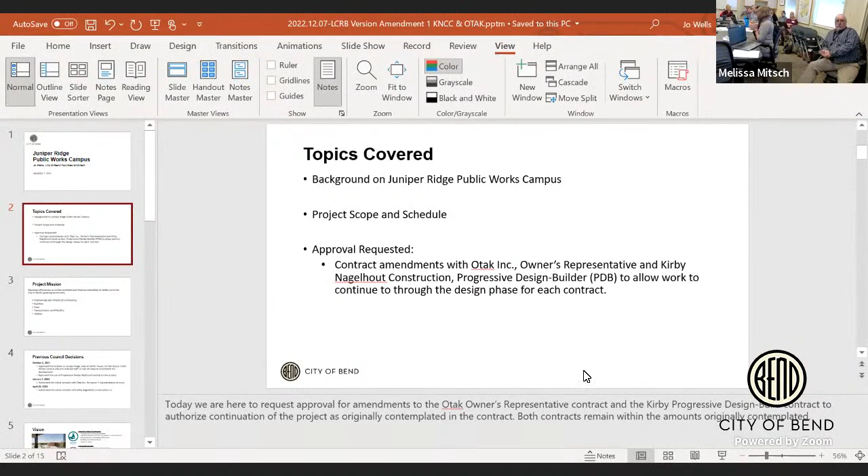Both amendments are within the amounts that were originally contemplated within the contract already, but this is to authorize the next phase to move forward.

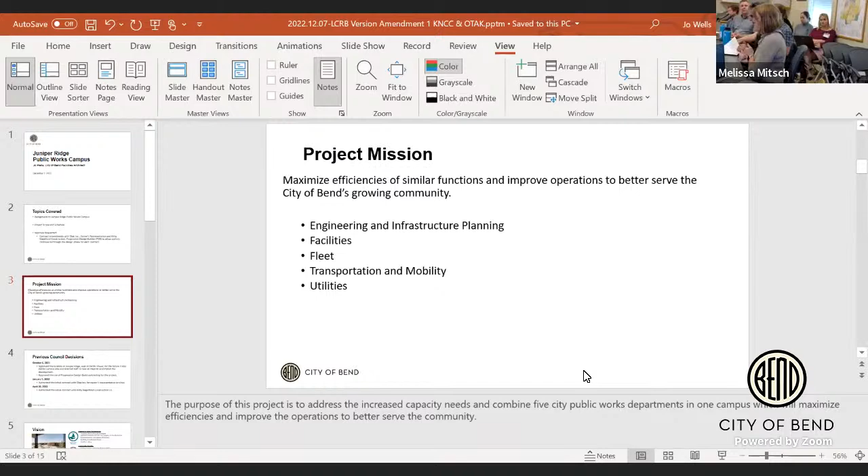The project mission, the purpose of the project, is to address our increasing capacity needs and combine the 5 city public works departments into one campus, maximizing efficiencies and improving operations to better serve our community.

There have been 3 council decisions on this project to date. The first was back in October of last year, when council authorized us to move forward with the alternative contracting method, as well as authorize the site within the Juniper Ridge location, just to the east of the Pacific Power site, between Cooley and Talus.

Just putting in the presentation there. Yeah, it's just, sorry.

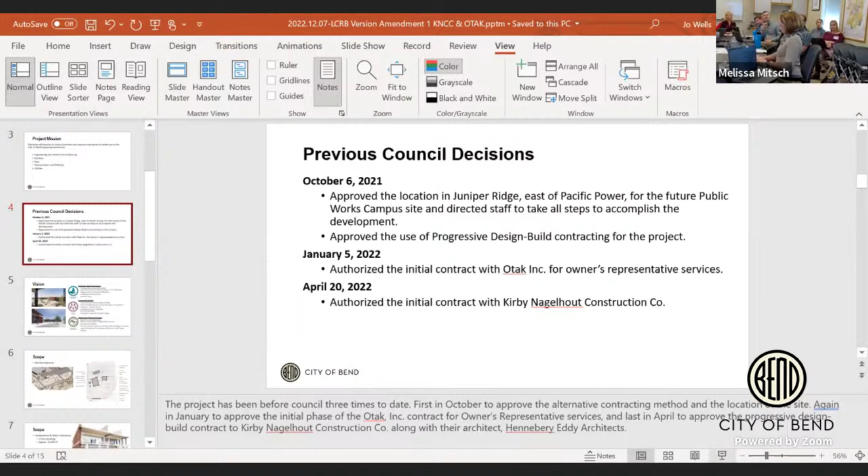What we've done to date, we've done a number of meetings, workshops and such with stakeholders and city leadership. In doing that, we consolidated a common vision for the project.

There are 3 primary categories incorporated into the vision: supporting a supportive work environment for our employees, providing community benefits to the community we serve, and also supporting council goals around sustainability by creating a regenerative campus.

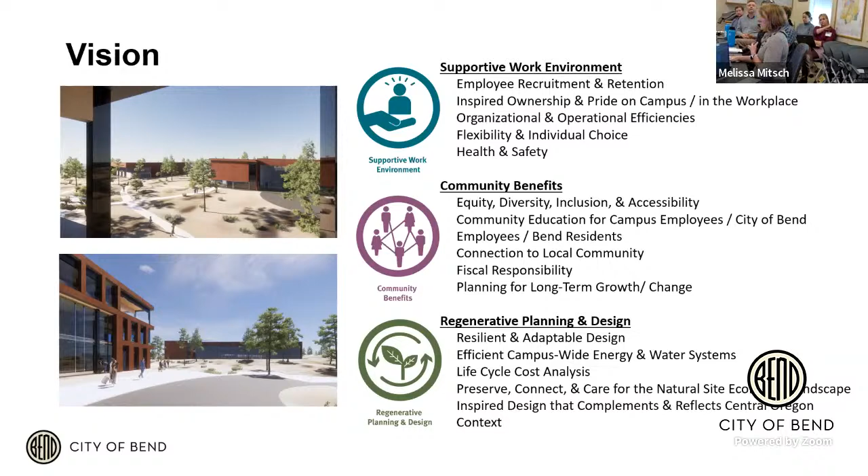The scope of the project includes approximately 30 acres. There are a number of activities that occur on the site to support the work that the departments do. There's a large yard that provides parking, both covered and uncovered, for the fleet vehicles. We have a decant facility, storage for outdoor materials including all of our sanding and rock piles that serve the city, and then a decant facility for taking care of waste from our vehicles.

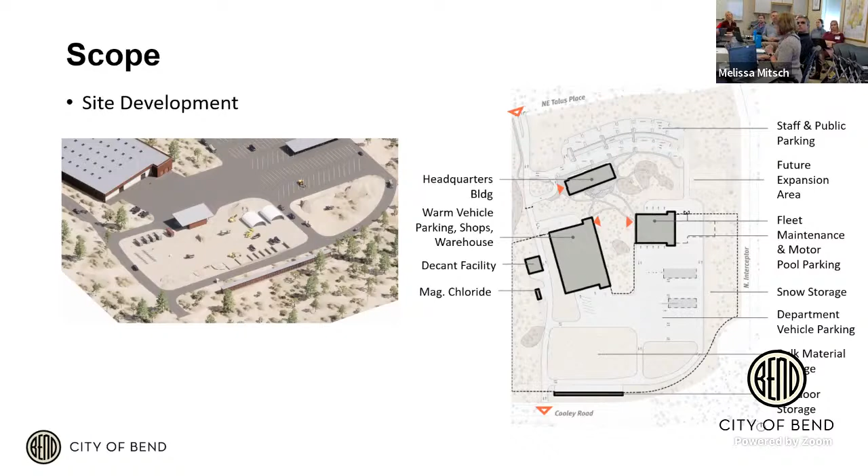There are also 3 buildings on site. You enter the site from the north and will head to the headquarters building first. That's the public access. Our headquarters building is a 3-story facility. It includes our administration facilities, meeting spaces, both for the department as well as for public meetings. We have the utilities water lab within that facility.

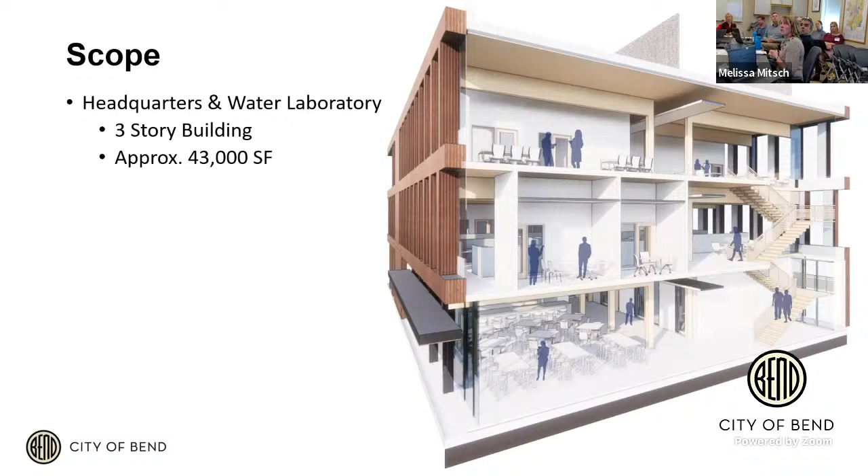And then we have space for our crew workers to consolidate into one location, with crew meeting rooms and support spaces for all the crews and employees that work on the campus as a whole. So a lot of the efficiency is through consolidating functions and creating a more active, engaged workplace. The second building on site is our warm vehicle storage building, shops and warehouse.

There are a number of fleet vehicles within our fleet that require a temperate environment to prevent freezing, so this is a large facility to house those vehicles and keep them from freezing, to be able to service the community. We are also consolidating shops that we currently have at our different facilities into shared shops for all of our crew workers, and we have a warehouse facility that will more efficiently store all of our goods that we utilize throughout the city.

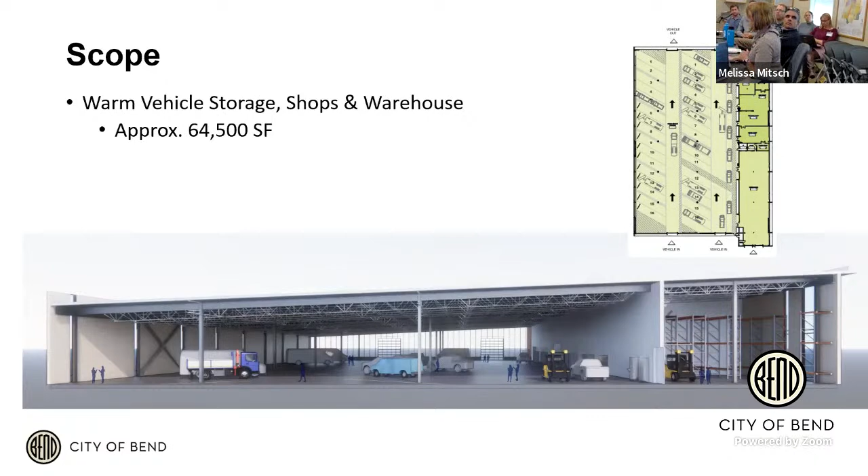And then the last building is our fleet maintenance facility. This will be relocated to the site, servicing all of the vehicles that will be on the site, as well as all of our other vehicles that the city has, including police and fire vehicles.

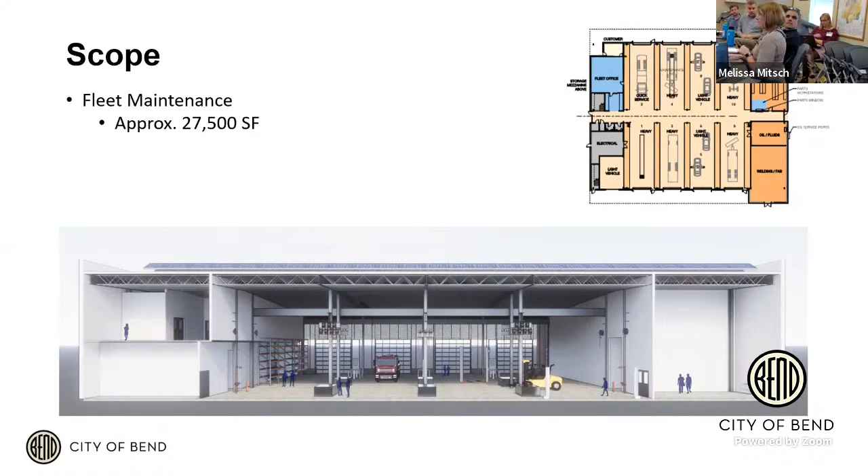As part of our goals for the campus, we have a pretty strong focus in diversity, equity, and inclusion. From the start, we selected partners to join us on this project who were also committed to community benefits and diversity, equity, inclusion. To date, our sub-consultants make up 4% Oregon certified firms, and another 5% are firms that otherwise would qualify, but are either certified elsewhere or haven't gone through the certification process.

As we move forward during the next phase, we will be finalizing a diversity, equity, inclusion procurement plan, working closely with procurement and legal to further our ability to bring on subcontractors that are certified subcontractors in the area, and encouraging more Central Oregon certified contractors to become certified.

In addition, from a sustainability lens, the project is pursuing LEED certification, and we have also enrolled the project in the Energy Trust of Oregon's Path to Net Zero program. We will be using the 1.5% for green technology that is required by the state for all capital work to go towards photovoltaics, which will help energize and provide the energy consumption for the site.

And we're also planning not only for today's electric vehicles that we have today, but also planning for the future as our fleet converts to electric vehicles over time.

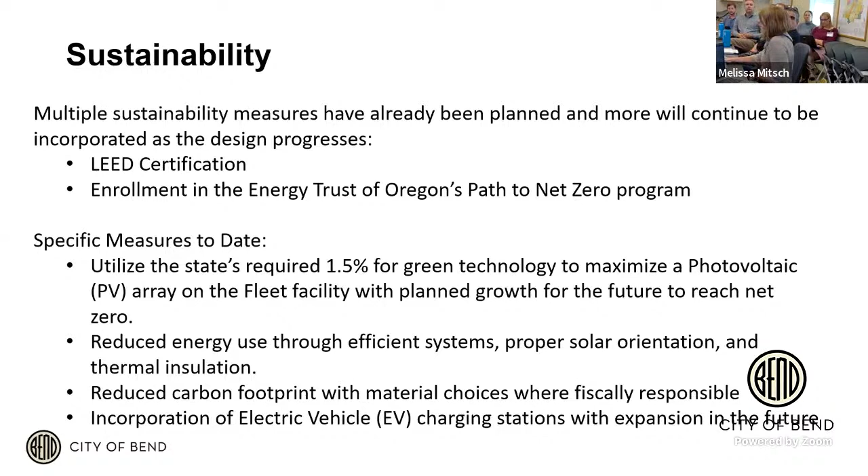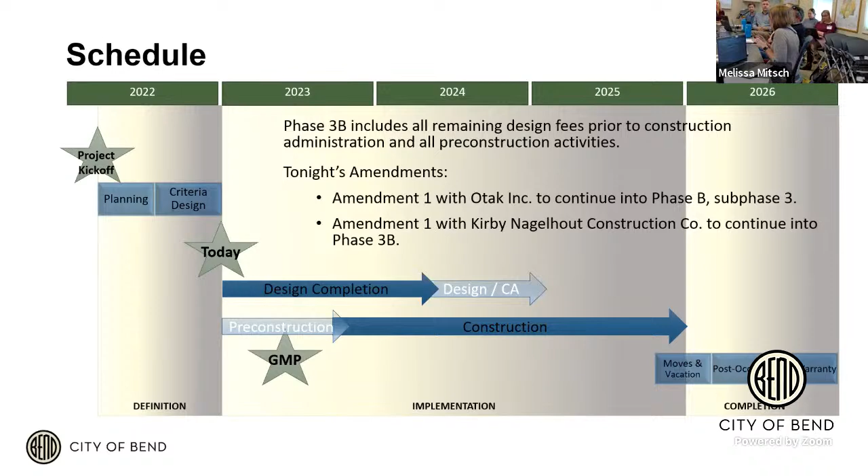From a schedule standpoint, what we have done to date, we've gotten through these first two phases, which we call criteria design and target budget. We've landed at, and today we're here to get authorization to continue and complete the design work required to do this project. We'll then be coming back to council, planning to come back in the springtime to get authorization for our guaranteed maximum price, which will complete the rest of the project. So right now we're only authorizing the design portion.

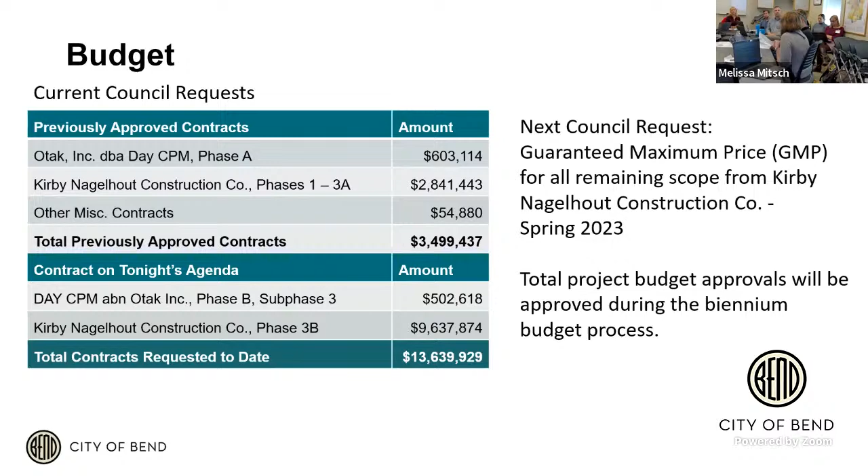And with the design portion, also the pre-construction services, as well as our owner's rep contract to continue. To date, we've authorized approximately $3.5 million of work to be completed, which will be completed at the end of the calendar year. And what we're requesting is approximately $10.1 million additional to complete the work as outlined in the issue summary. And wrap it up with questions.

Okay. Just if there's any feedback on if you want to go on the presentation, this is for the full council Wednesday.

I think probably the whole council is going to want to know the history of why this is needed, because we've gone through it a couple times, but it's good to get a little bit of the history and also what's happening at the place we're making. There's just pictures of our existing facilities and all.

And Russ, maybe you could tag team with Joe, and we typically look at the why from an operational perspective. So maybe have like an intro to Joe. That's great.

And just to commend Joe, there's been a lot of staff involvement in this too. We have a very aggressive approach where we've had multiple open houses and field trips, and it's significantly changing going from our existing setup.

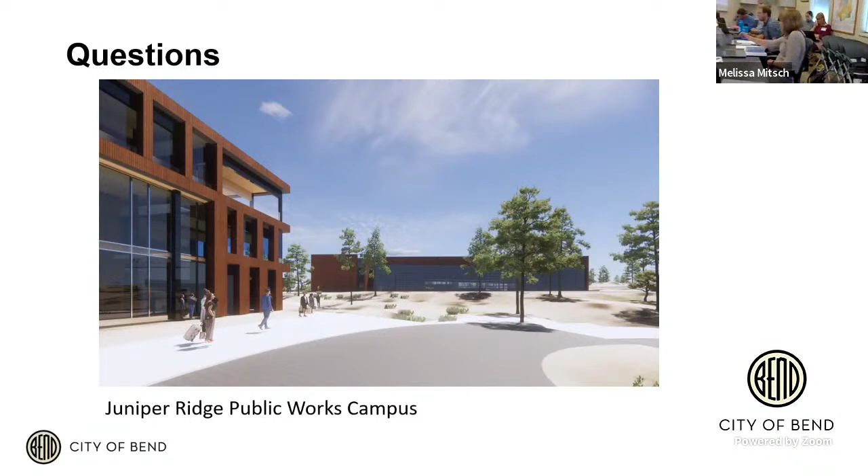So the next item is the Purcell Boulevard Extension, proposed contract with Taylor Northwest, and then also an overview of the entire Neff and Purcell project. We'll share it.

I'm Drew Wells. Okay, didn't mean to slow my time down. Yeah.

I'll just say while you're bringing that up, just to frame it up: you're gonna hear from Drew on December 7th and again on December 21st. That's intentional, because one of the projects is SRF funded, and we had to separate that to make it obvious which one was and which one wasn't.

It's the clean water state revolving fund, a fund that we use to help fund, so. What he's gonna talk about tonight is not DEQ funded, and for today you're gonna cover the whole thing, but on the 7th it's not DEQ funded, and on the 21st it's what is. We're split, yes, not for the purposes of this, but the two council meetings, 7th and 21st. Don't tell me in a few years these acronyms will be known. Yeah.

The reason CWSRF, Clean Water State Revolving Fund, is on the intersections is because there's sewer and stormwater improvements, which is what's eligible. The extension only has water, which is not eligible. So that's the reason why some have the funds and some don't.

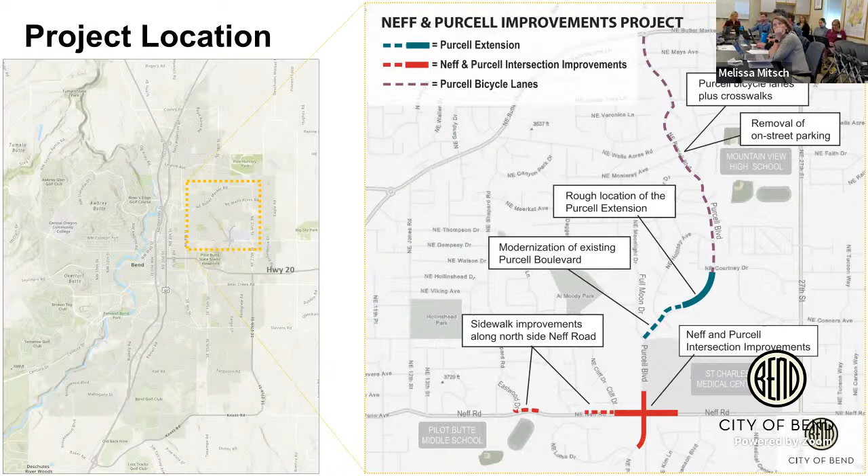There's a little more detail on those different sections. You can see some more detail on the intersection there with the different sections.

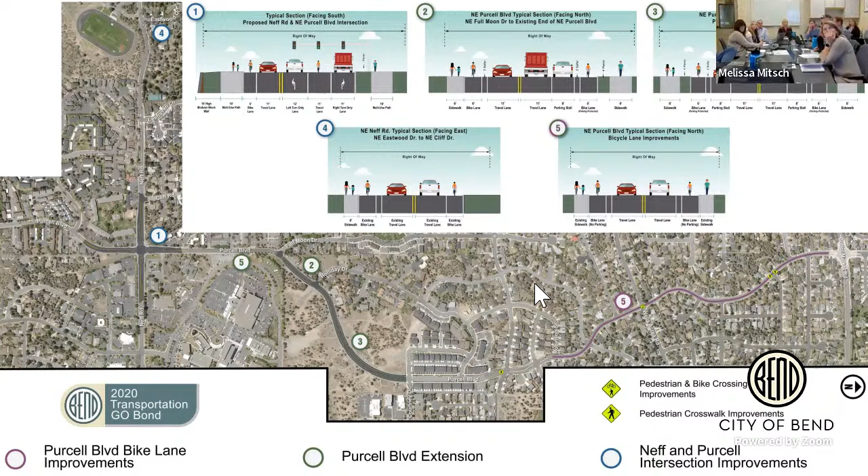I'll just highlight some of the things here, like in the extension area that we're building - the bike lanes, and the cars are the barrier and buffer between the bike lanes and the travel lanes. So where there's on-street parking, you'll see some cross sections that really highlight that separation. Yeah, I might drop that slide altogether.

So the first, biggest component of this project is the intersection project, which is reconstructing the Neff and Purcell intersection. There are a lot of issues at that intersection - it's an outdated temporary signal, never meant to be permanent. Now we're finally replacing it. There are ongoing safety concerns due to capacity issues, with long queues and congestion down there. The proposed improvement is to totally reconstruct the intersection and replace it with a traffic signal, which was the selected alternative from the alternatives analysis in 2019, compared against a roundabout.

In addition to reconstruction of the intersection itself, there's some sidewalk infill west of Purcell, so there will be continuous sidewalks from Purcell to 8th Street on completion of the project. There are also significant utility improvements within the intersection for sewer and storm - the slopes were too great, just some topography issues there, and it was not functioning.

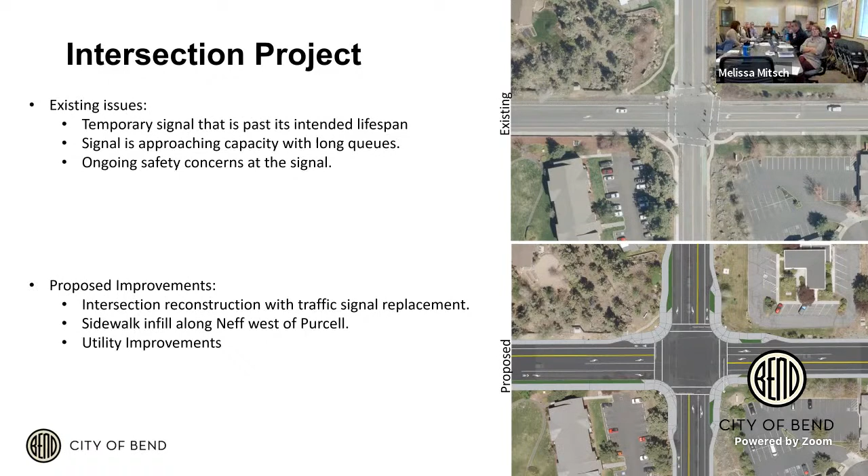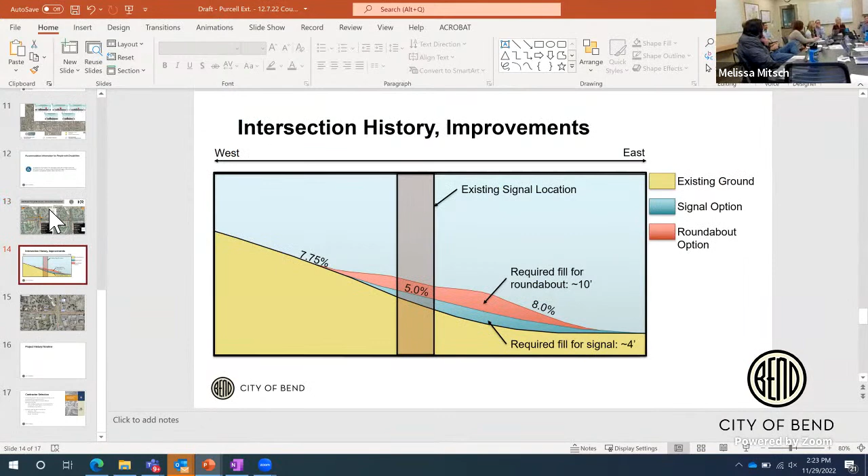Maybe that's a question for council - we previously presented the comparison of a roundabout versus a signal. Do you want that revisited, or was that decision made years ago? Do you want the highlights of why the roundabout was not chosen? It'd be nice to know the history.

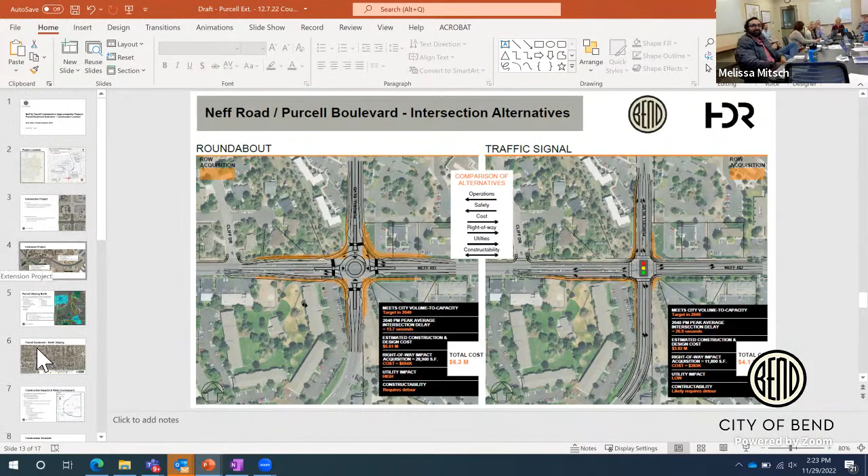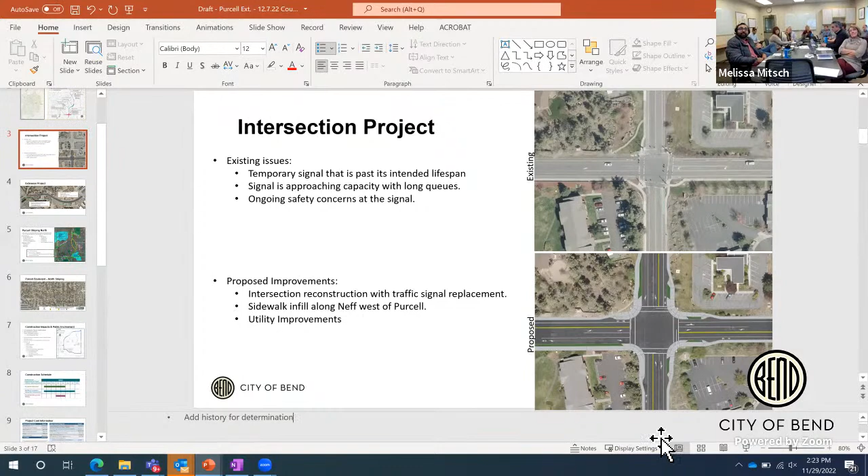On top of that, there's the modernization section, which there's existing road there, however widening to add sidewalks, some parking on the east side of Purcell and the bike lanes. Those will also be parking protected where there is on-street parking. And then there's also marked pedestrian crossings that'll be lighted as well at Full Moon, which two there, as you can see. And we will be striping for bike lanes from Full Moon south of the intersection with the continuous bike lanes from Highway 22, buffer bike lanes.

So in this section, there's the whole, they're all buffered. Excuse me, yes, they're not park protected though. But yes, they are all buffered.

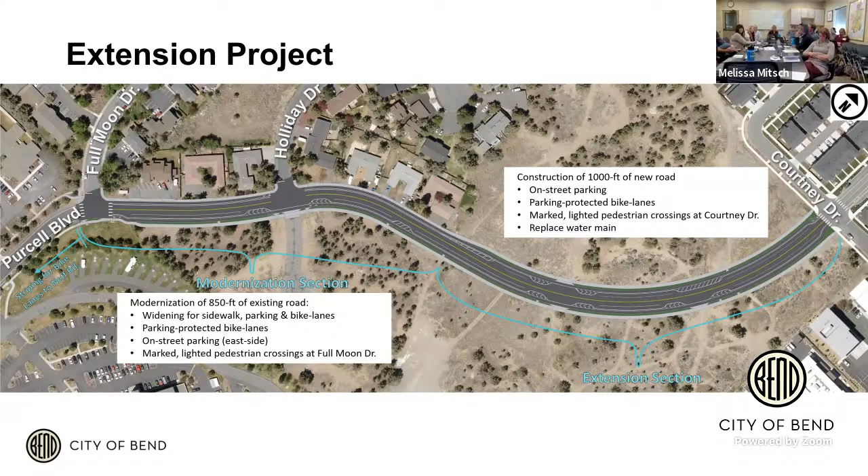So that's the extension portion of the project. Sorry to interject here, as Russ mentioned, we've worked extensively with St. Charles to acquire this land with dedication. So there was a lot of partnership between the city and St. Charles to get that land for us to even do this project. Otherwise, they would have done it when they did their master plan development, of which they have no plans at all, no timeline. So this really helps the city complete that roadway corridor.

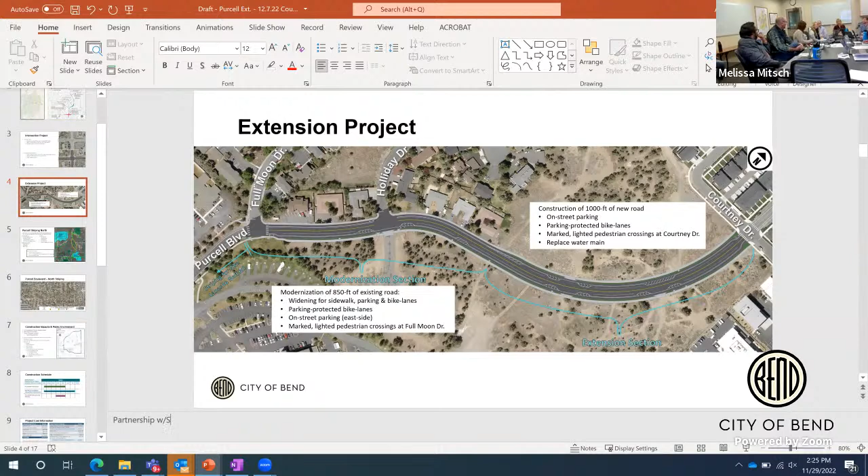Did I discuss that? Just say it was a partnership. I'd say we basically said, well, you guys can build it on your dime, and we can build it if you give us the right-of-way. We'd rather build it - they were really nice.

Okay, it's the extension portion of the project.

The third project in this area, which won't be completed by our construction contractor for the Neff/Purcell Intersection Improvements Project but completed by city staff, is striping bike lanes between Butler Market and where they currently end near Jackson or Indigo Street. You can see in that dashed line area. And so this provides a lot of connectivity between all these services, the schools and community parks.

Definitely an important gap to connect, provides a little connectivity. You can see the light green is what's been funded or planned to date, and dark green is planned, not yet funded, and there's the existing trails you can see on there.

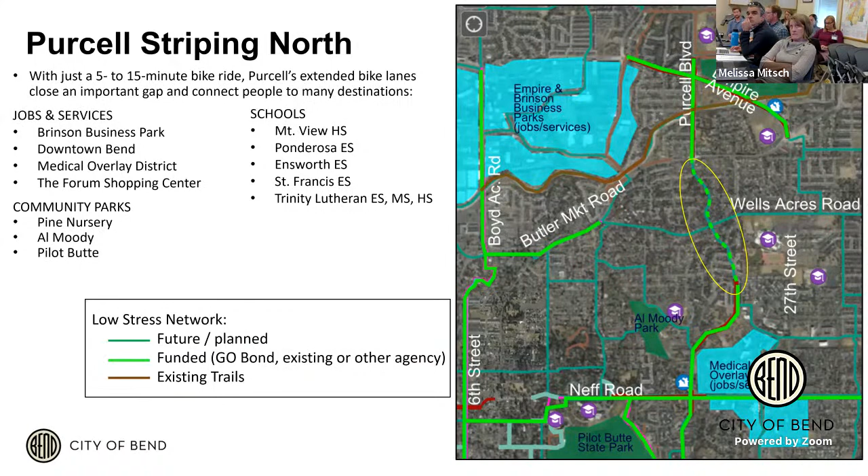So it provides a good connection between there. And the hospital mentioned that it provides another way to get emergency vehicles to the hospital. Yeah, definitely, and it pulls a little bit of traffic off 20. And it's paint, right? It's just paint. Yeah, that's all there's room for, paint.

As far as the feedback, I'm not sure how much to discuss from the open house. There were concerns from a number of people about safety, how this will impact the safety of the corridor, traffic use, and also the loss of on-street parking.

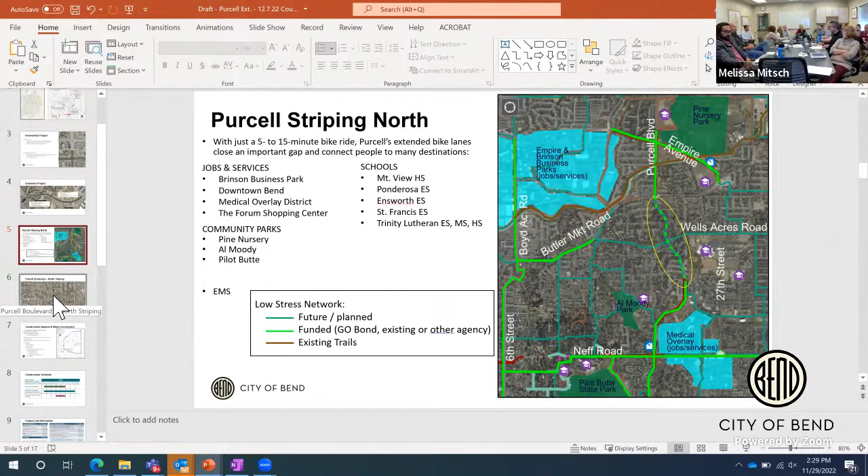Crossings were a big one. Some of the city crossings—are they just painted? They're looking at a raised median in the middle at some of these locations as well, so it might be more than striping. But I think the important thing is that it's been a collector on the TSP for a very long time, so we're just now implementing it.

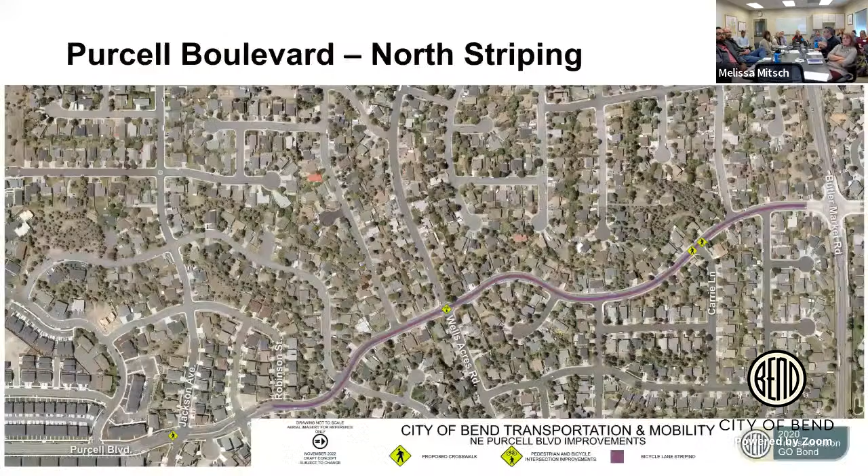With this project, particularly the intersection, because of the grades we're required to fully close the intersection so we can construct it—that's the constructability challenge. With that comes significant impacts to the public. Because of the need to close this intersection, we utilized the best value procurement method for selecting a contractor, which balances a blend of qualitative selection based on proposals and price.

Taylor Northwest was selected as the highest scorer, and they proposed what they call a siren response plan as an alternative approach to helping get EMS through this intersection. Simply put, they'll have somebody on standby to throw a trench plate over their work and let EMS through as soon as they get a call. We'll be coordinating with EMS and Taylor Northwest to ensure that's successful.

Because of this significant impact, we have a pretty robust public outreach effort. We've presented at 2 open houses and 2 Mountain View Neighborhood Association meetings to date. We have another construction open house planned for late January 2023, and we'll continue outreach through multiple methods, coordinating with all the major stakeholders in the area—hospitals, schools, EMS, and the heavily impacted nearby residents and businesses.

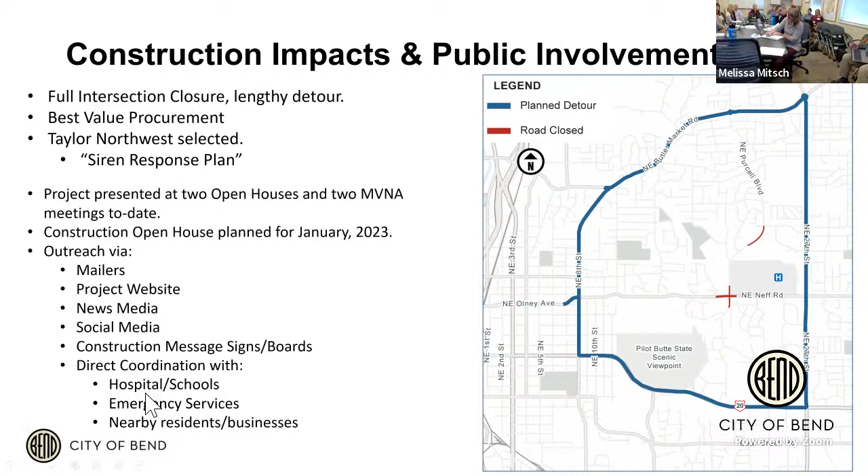You can see the map on the right. It's a fairly simple construction schedule—we're going to have the extension and the intersection constructed concurrently, with the extension being completed near the end of May. The city would be striping the bicycle lanes on that north section so that's complete before the extension opens. Finally, the whole intersection is expected to be open at the end of July.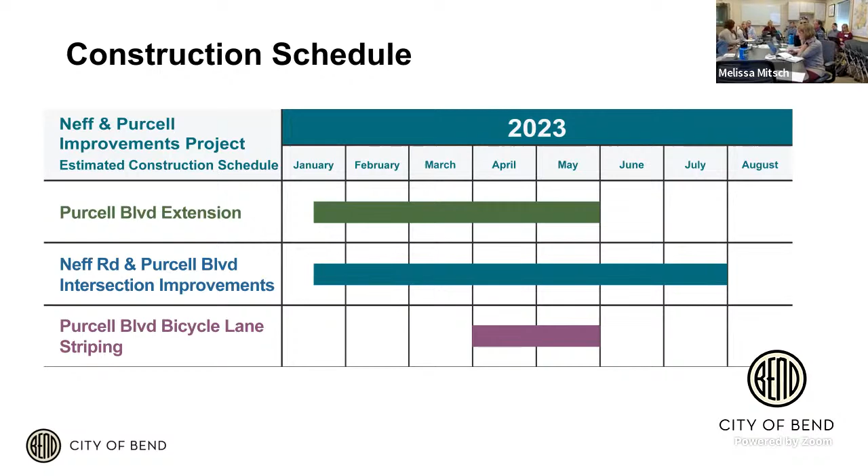The current project budget has multiple funding sources, split over the 2 parts of the project constructed by our selected contractor.

The council presentation will change a bit, but those would be the amounts. You'll see the same slide twice—on the top right-hand column it says on tonight's agenda, which is December 7th, that's the extension contract for 2.296 million. Then on the 21st, we'll bring the same information and it will apply to the intersection construction future contract amount, which is 4.8 million. So it's the same information regardless of the date.

It isn't one contract—we're asking for one contract on the 7th for the extension, and another one on the 21st for the intersection.

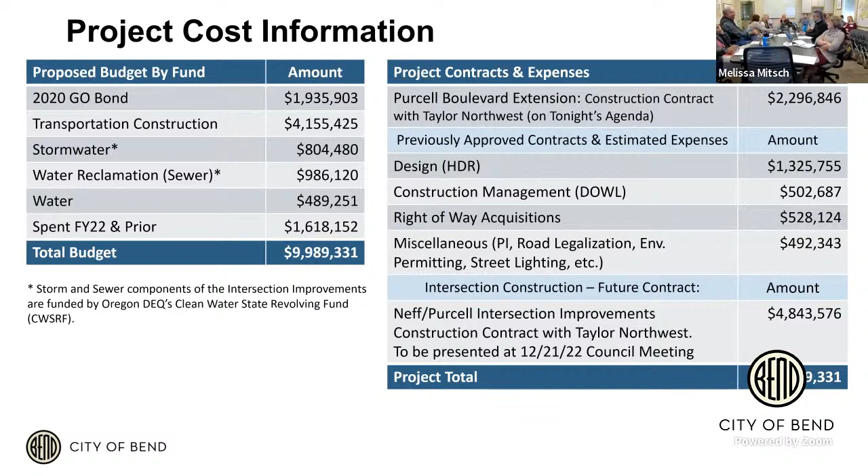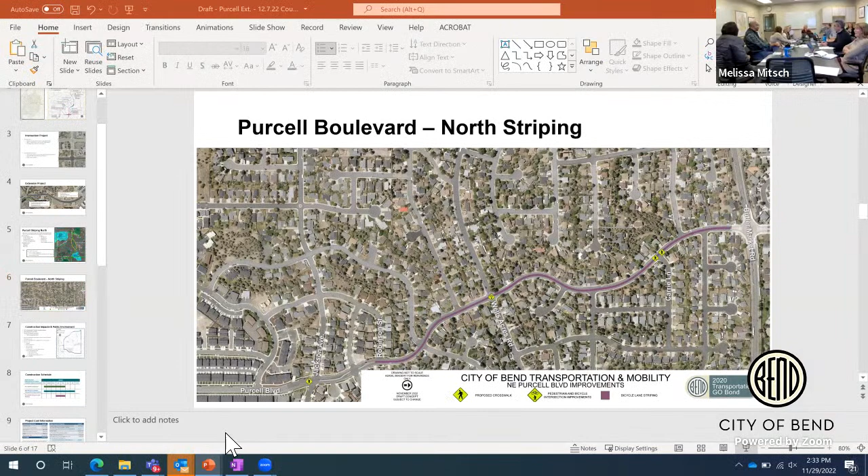DEQ has to review it for concurrence, so while they're going through their review period, we're going to do one contract so we can get going on the extension. Once we get approval, we'll bring the other contract on the 21st. It's a bit of a piecemeal approach, but that's the best way we can execute this to get the contract moving. We wanted to preview this for people, just so you know it's coming back at the next meeting.

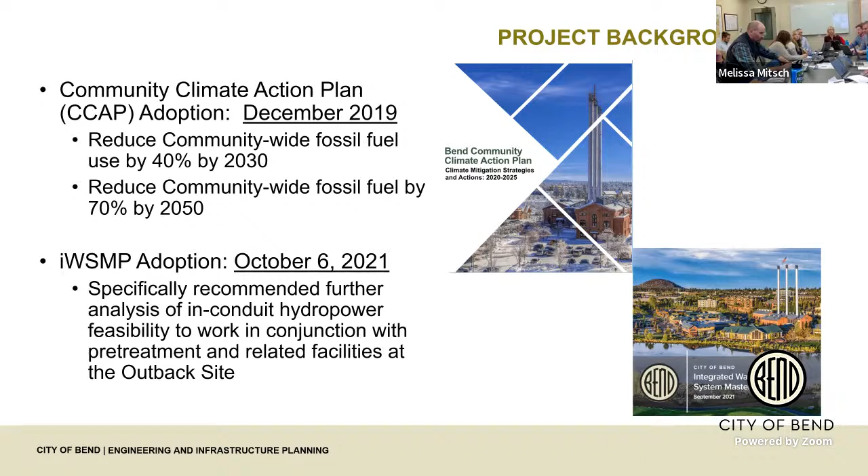So with that, I want to show a quick overview schematic of our water system. We have our intake facility up at Bridge Creek near Tumalo Falls. As you can see, that water experiences a pretty significant drop in elevation. We have a really unique water system here in the city of Bend. This shows a nice visual of the large elevation change we get, not only from the intake facility to the water filtration facility, but also to other lower points of our distribution system—that's water pressure, that's potential energy, and that's what we're interested in considering.

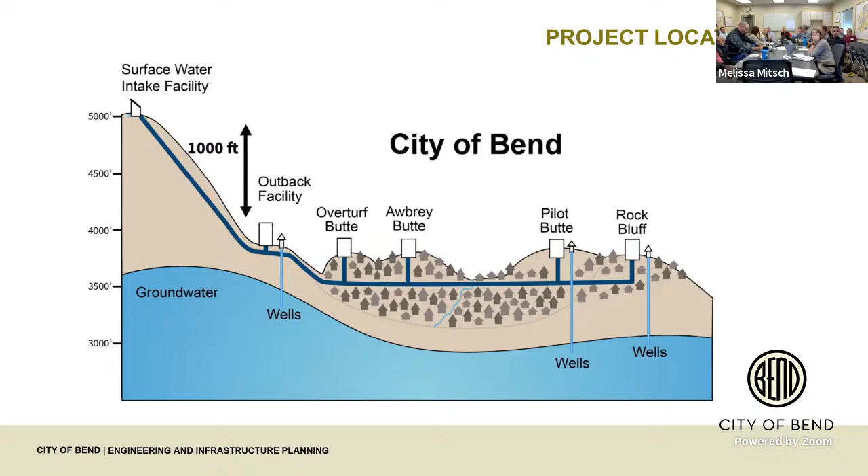So a little bit about in-conduit hydropower—just wanted to help define this. In-conduit hydropower is utilizing existing pipelines and existing water uses, and that's really the crux of this whole concept. We're taking advantage of existing water usage; we're not requesting additional water usage. We're just trying to best optimize what we are currently undergoing.

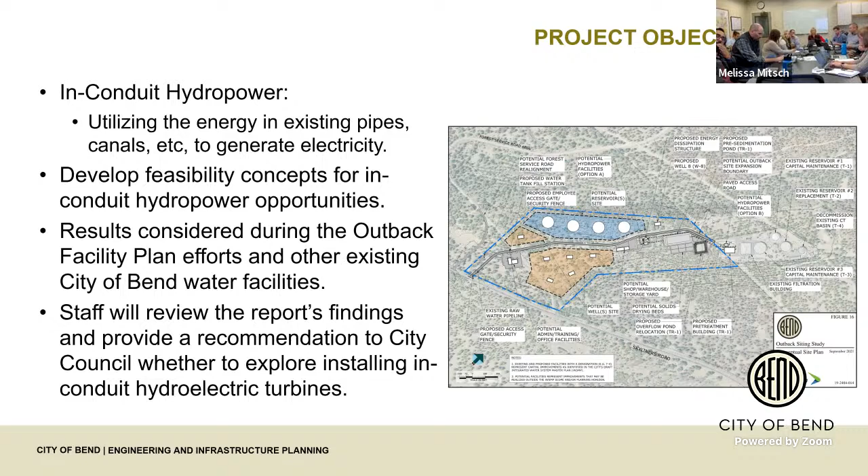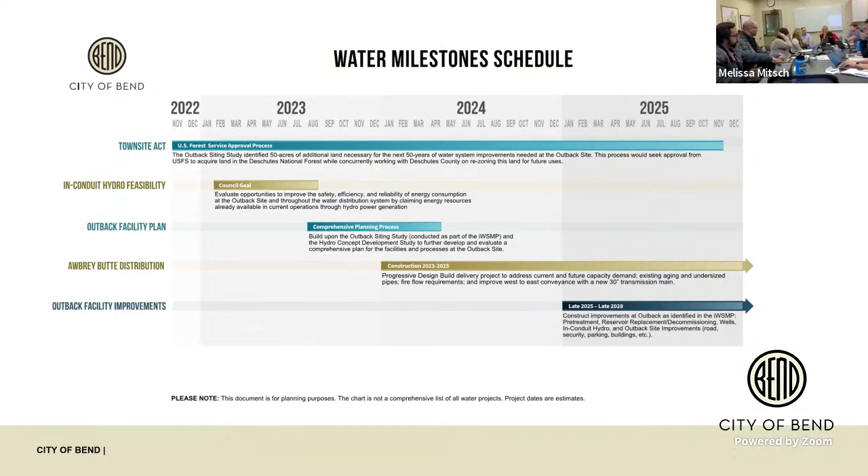So yeah, with that, like Kirk mentioned, the big point is this is not driving the additional acreage at the Outback facility. This is something we believe could really benefit the whole system, but not a need.

So I would be the project manager representing the owner, the city, working under Brittany Barker, my principal engineer. The selected consultant was Jacobs. They were selected through the typical qualifications-based process. We received only 2 proposals that were scored by 5 city staff members, and they were provided the notice of intent to award October 14th this year.

Look at the funding. The proposed budget for this would be 248,000, so just shy of 250. We've been working hand in hand with the Energy Trust of Oregon over the past year. They've been a fantastic steward for this. They have re-upped their full potential account with them to the original 200,000, and they've earmarked away at least half of this proposed budget. So they're fully prepared to support us as a reimbursement if we do decide to proceed with this study.

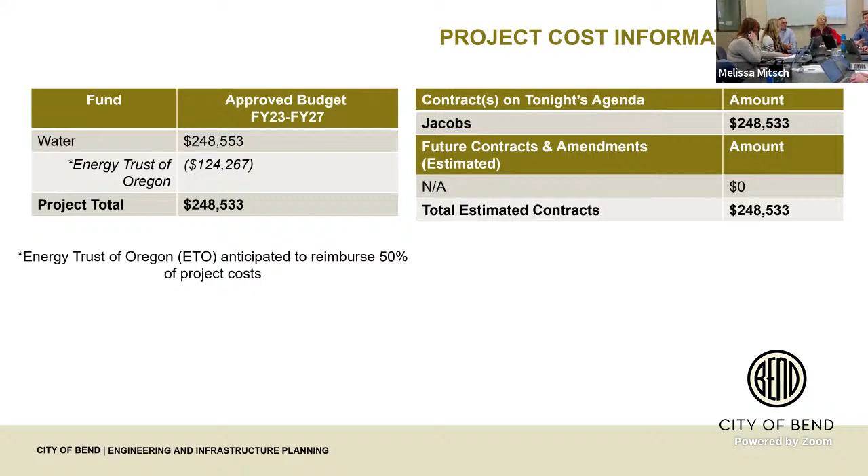Jumping back, we're confident in Jacobs' ability to deliver on this. They have a lot of really good research and experience with this all over Oregon, Washington, Colorado, and the whole country. They're very hands-on and knowledgeable, and we really think they can help deliver a study that can both identify potential for hydro, but then also a roadmap to proceed with any of these, identifying permitting needs, engineering, cost analysis. That's a pretty extensive level of detail that we're looking for in the study. So with that, I'll open it up to some questions.

Yeah, and we did a tour out of the irrigation district. Potential in-conduit, which is pretty cool. Yeah, it's pretty cool how they're doing it.

I'm comfortable with this being on consent with the idea that no matter what, we are going to need to do a feasibility study, and then the community, council, and all of us can actually look at the politics and cost and benefit of it once we know whether it's feasible. Yeah, I see some work sessions with council after we get the results of this, trying to figure out. It doesn't make sense to spend time on it if it's not feasible. If it is feasible, it makes sense to spend a lot more.

Even talking to the irrigation districts, it's not penciling the way it once did, but it still might make sense to us for a lot of different reasons, like resiliency. But that's what we want to study to show. And I'll say, the comparison to irrigation districts is a completely different context. How you bring this power to market and what you do with it can have tenfold magnitude differences in value. An irrigation ditch doesn't require that much energy. Our water filtration facility certainly does. Our reed pump station certainly does. So we have a different engagement with this.